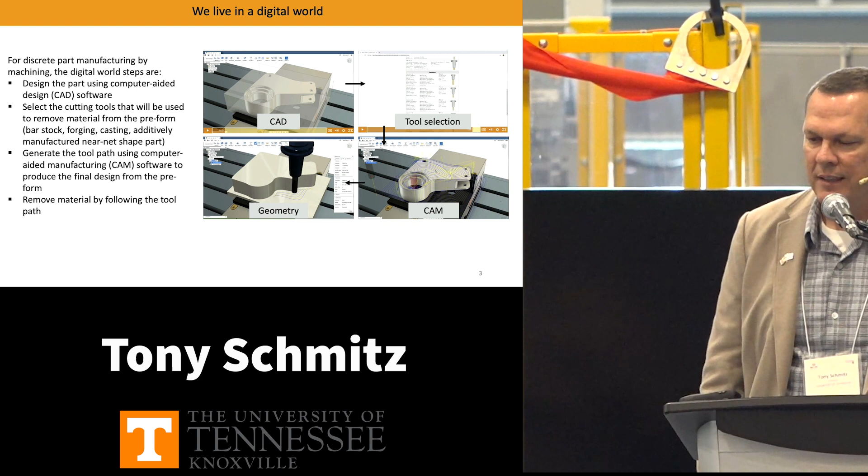Okay, so that would suggest that it's just geometry, but if you're in the room, you know that's not true. There's lots of things that can go wrong. There's many a slip twixt the cup and the lip, right?

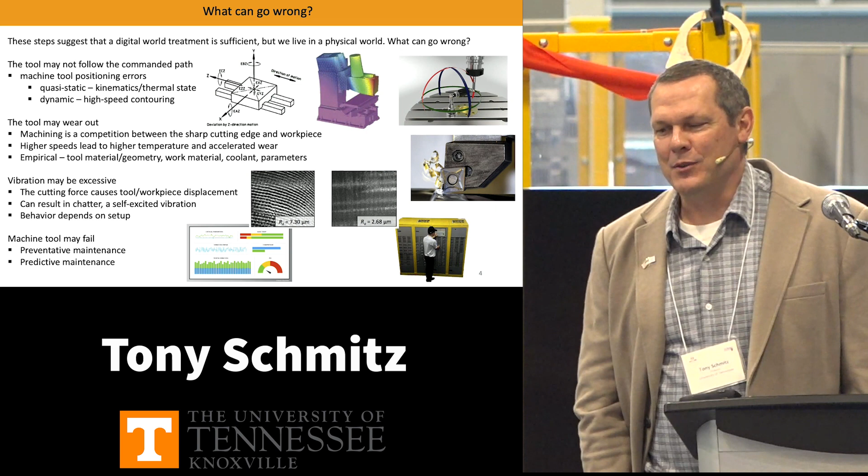So the machine tool may not follow the commanded path. I'm sure that's not true for any machine tools in this lab, but from my own experience, sometimes they don't. They have error motions, which could be quasi-static, so they change slowly over time, like thermal error motions, for example, or they could be dynamic, where we have high-speed contouring and the controller affects that positioning performance in the corners.

The tool can wear out. I saw lots of studies going on here just to my right about learning about tool wear to assess it and figure out when we ought to be changing that cutting tool. That remains largely an empirical effort. I'd say we probably haven't solved the physics around that yet, but I anticipate that we will one day have predictive models. Vibration can be an issue.

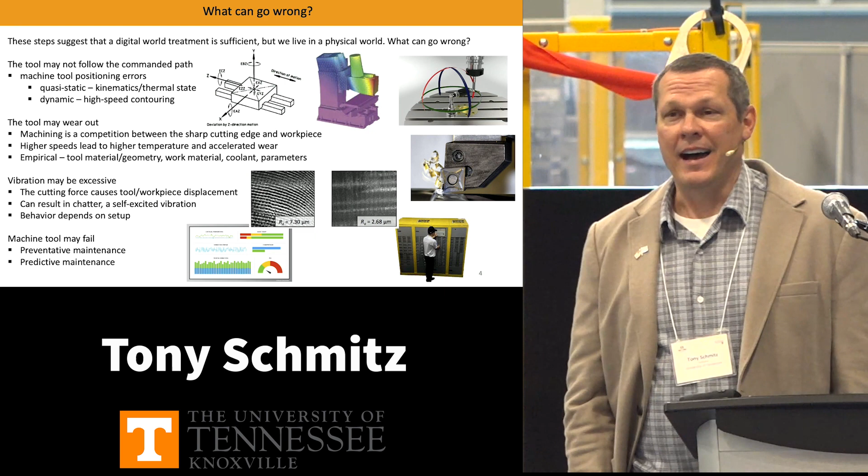That's where I spend most of my time, thinking about the implications of vibrations in machining applications, and there's some of that work going on here as well. I was thrilled to see that. And then the machine tool itself requires preventative and predictive maintenance, and that's going on here too. I had not seen the lab, nor did I know what projects were going to happen before I made this presentation. So it was very nice to see that we're so closely aligned in the things we're working on.

We have a CAD representation of the part, and we select our cutting tools. Once I've selected a cutting tool, put it in a holder, and mounted that holder in a spindle, I've now defined a dynamic system. The best use of that dynamic system depends on its vibration response, so we need to consider that when selecting our machining parameters.

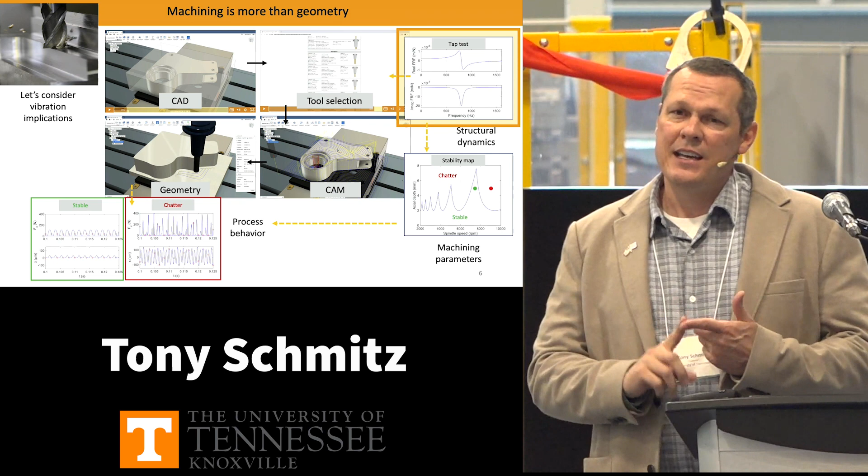One important thing in this narrative is the dynamic response at the free end of the cutting tool, or the tool tip. We characterize that dynamic response using a tap test. We have an instrumented hammer, we excite the tool, and we have a vibration transducer to measure the response. The ratio of those two is what we call the frequency response function, shown here graphically. Essentially it shows natural frequencies, stiffness, and damping ratios for each mode of vibration, and I can use that information to select cutting conditions.

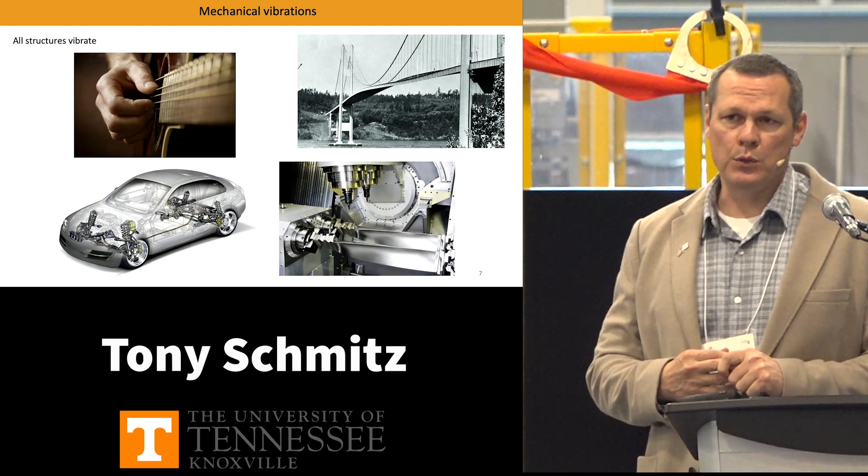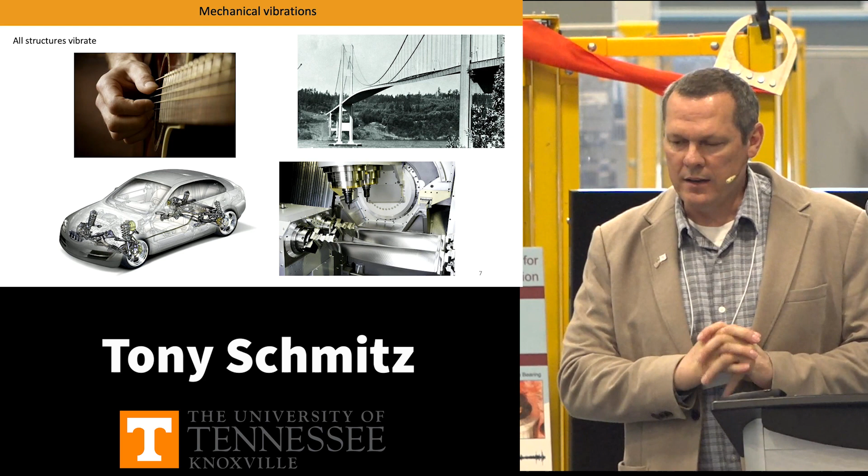At the end of the day, all structures vibrate. When I first started learning about machine tools, I was focused on machine tool metrology, then I morphed into a vibrations person. The way machine tool metrology was described to me was: you can think of the world as being made of jello. It's always moving, it always deforms, and everything matters. In machining, the reality is it's a structure, and all structures vibrate, so we have to think about that vibration response as we try to do our best work.

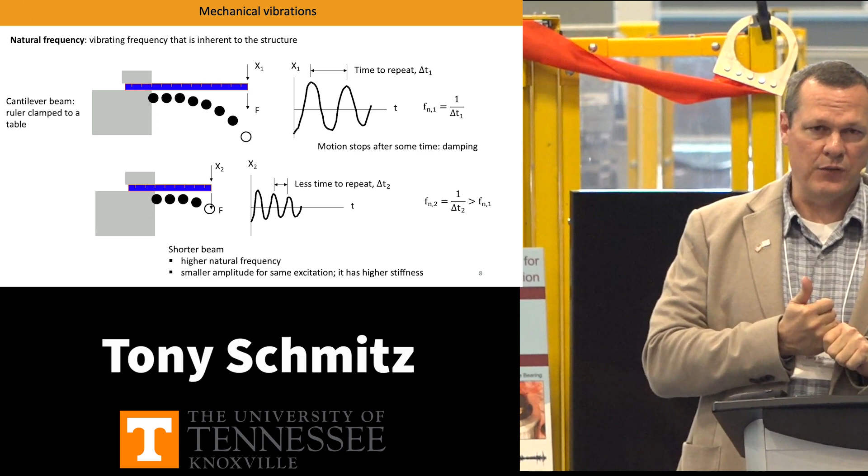Now, what if I change the length of that ruler? I just shortened it. Same ruler, same table, just made it shorter. What we'd anticipate is that the time it takes to go up and down in one of its vibration cycles is different, and not only that, but the size of the vibration is different. So I have a different time period, a different natural frequency, and a different stiffness.

That's why the stick-out length of our tool from the holder matters, and it's why it's so difficult to select machining parameters without knowing the dynamic response of your cutting tool. I'm going to be controversial and say if you don't know this, you're guessing.

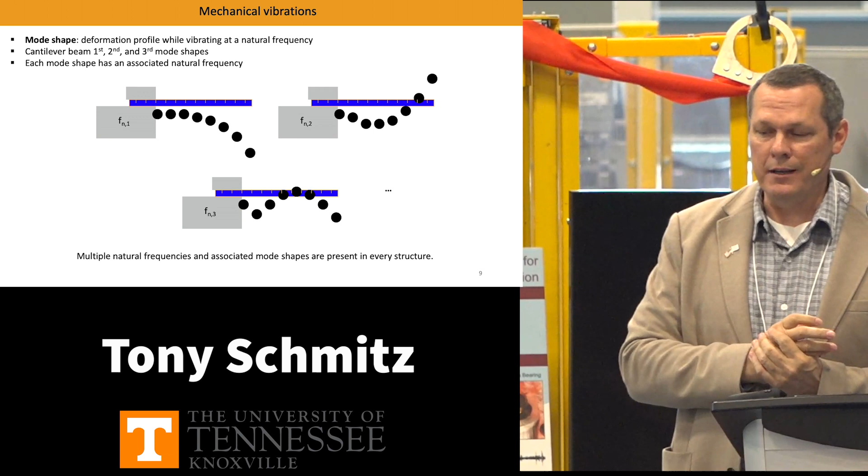Okay, but it's more complicated even than that. If I did have that ruler and I clamped it on the edge of the table and I pulled down and let it go, there is that response that we would see. That's what we call the first mode shape, which is oscillating at the first natural frequency.

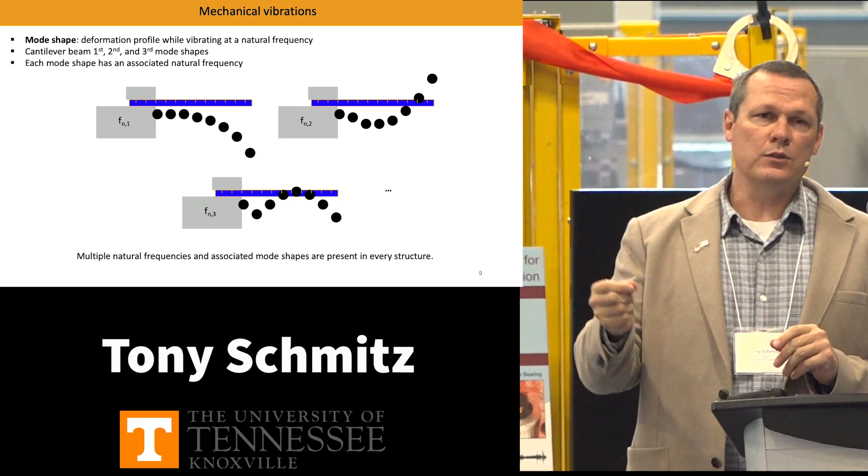But simultaneously with that mode shape, it's also oscillating at its second natural frequency. Its mode shape looks like this. It happens at the second natural frequency, which is higher than the first. Simultaneous to that, it's also doing this - this is the next natural frequency and mode shape. And it turns out for continuous systems like a cutting tool and a holder and a spindle, there's an infinite number of natural frequencies and mode shapes.

So it's a very complicated dynamic system that we want to leverage in order to select machining parameters. The way I think about this frequency response function, which is this graphical representation of these system dynamics, is like fingerprints. Each time I put a tool in a holder and place that tool and holder in a spindle, I get a frequency, I get a dynamic signature, I get a fingerprint. And when I change tools or holders, I have a different fingerprint.

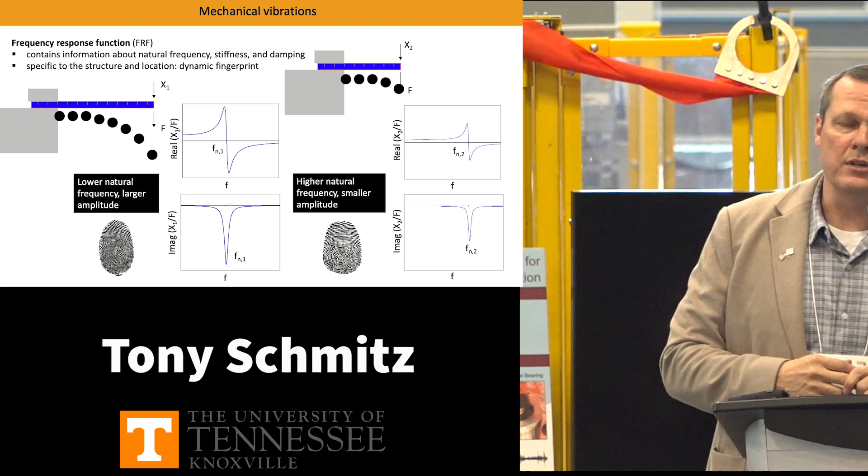That fingerprint is the frequency response function, and so it's the blue curve shown here in the top and bottom panels. Essentially what those curves mean: taller is less stiff and less damping, and left and right is the natural frequency. So if I have that information, I'm able to make educated decisions about machining parameters that I want to select. So if I change the length of that ruler, I now have a new fingerprint, a different frequency response function, and my best use of that cutting tool would be different.

My only math slide is here. For some, they'll be rejoicing that I have some math, and some will be running out the back door. That's okay, hold your seats - this is the only one.

So we can represent that frequency response function mathematically, and the only reason I include this is so you can see the terms that appear: stiffness, damping, natural frequency. We're all familiar with those concepts - they show up when we do this measurement. So if I can get at that measurement, then I suddenly have a way to avoid the guesswork in selecting machining parameters as I'm writing my CAM program.

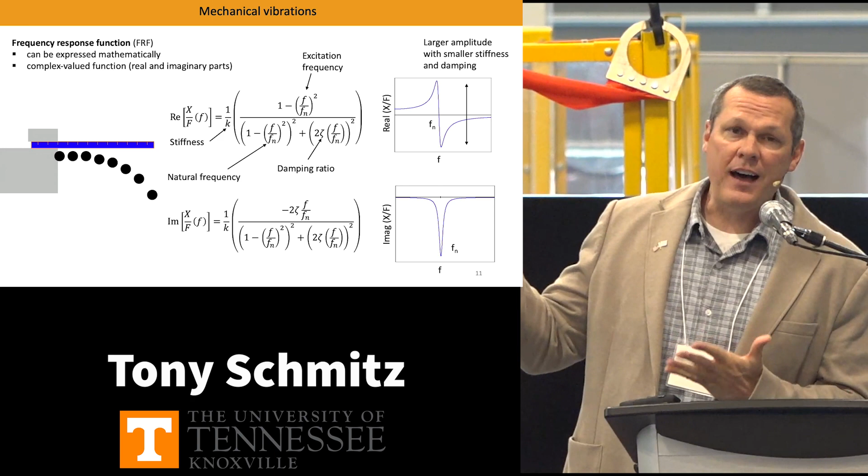Okay, so the same information is captured mathematically now that we showed with the cartoon of that ruler going up and down, and then I can plot those equations to get the frequency response function we've seen on the right.

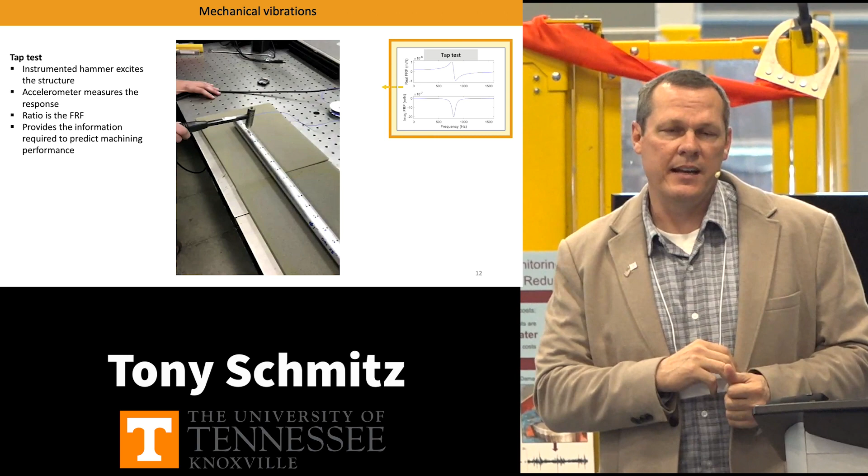Okay, so we get that information by something that we call a tap test. I have a hammer where I tap the structure. That hammer is instrumented - it has a load cell inside, so I'm measuring the force that I'm applying. And then I have a transducer that measures the vibration. What you see here is just an aluminum bar, the hammer that's going to tap that bar, and then there's an accelerometer attached to that bar. So that lets me measure that vibration signature that happens in response to the tap test.

So the sound's going to come up here, and we're going to hear a tap test in real time.

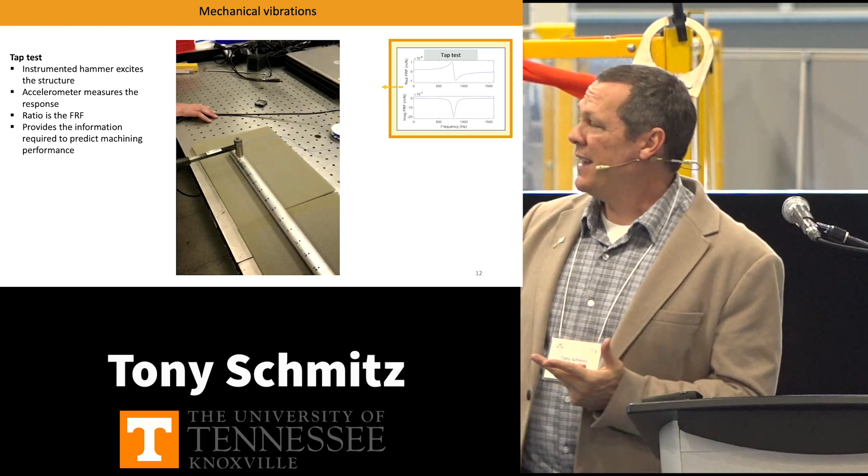So what you heard was the natural frequencies all at once, just like ringing a bell. Those natural frequencies produce acoustic waves that I can hear. The same thing happens in machining. When I hear the sound of machining, I'm either hearing forced vibration, which is good, or chatter. If we had chatter happening across the lab, everybody seated here would know there was a problem - it doesn't sound right. So we can use sound in order to assess what happens in machining.

Once we have that frequency response function, how do we use that information? That's the stability map that I showed you earlier. Let's talk a bit about machining dynamics, and we'll end up with a description of that stability map.

As I mentioned, cutting tools are designed to be stiff, and stiffer is better, but there is no infinitely stiff material - they all deflect when a load is applied. So as a mental model, you can think of a cutting tool, holder, and spindle as a stiff spring. That's a better representation than thinking of it as a rigid body. The workpiece can also be flexible.

I wish it were the case that we only had to worry about the cutting tool, but sometimes the workpiece can be the most flexible element in the system, so I have to consider it as well when describing the system dynamics.

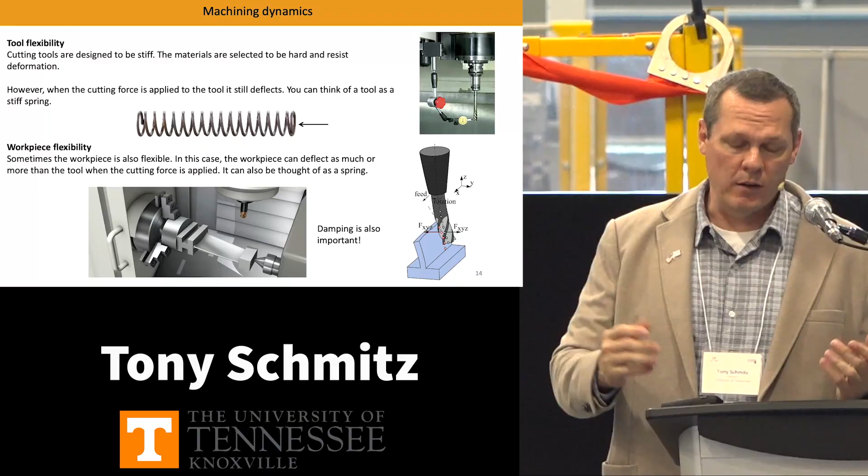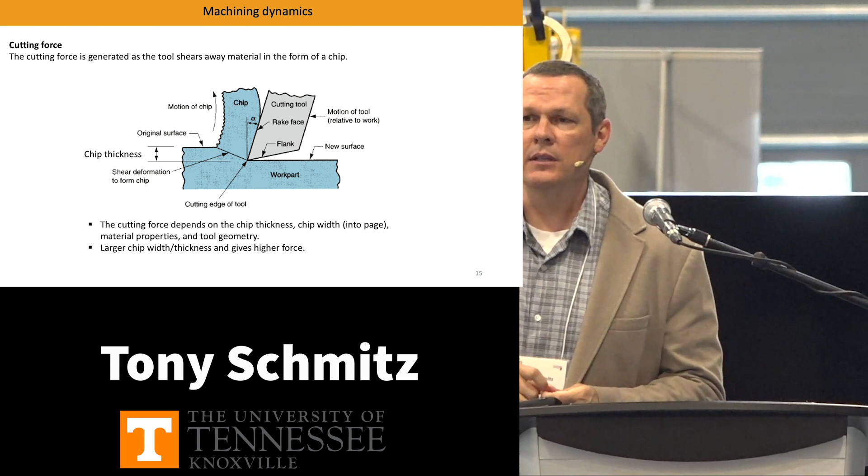The other thing we have to consider is that I have this system that deflects when I apply a force to it, and I have a force. If I'm machining, then I'm removing material in the form of chips, and that requires a cutting force.

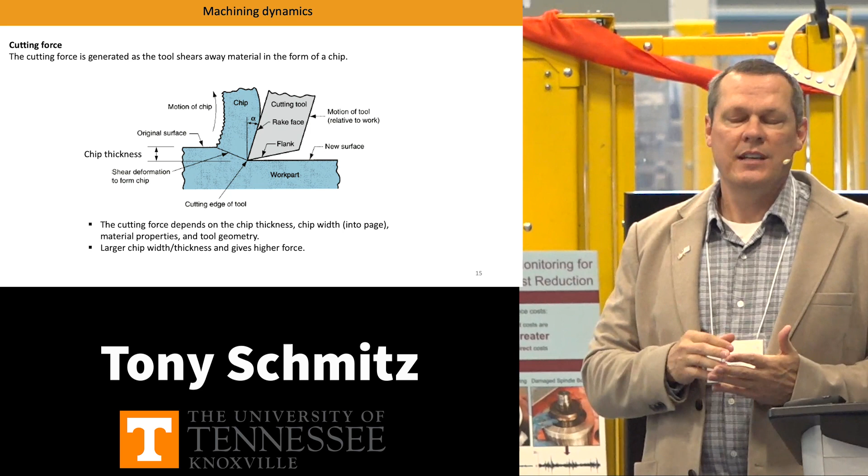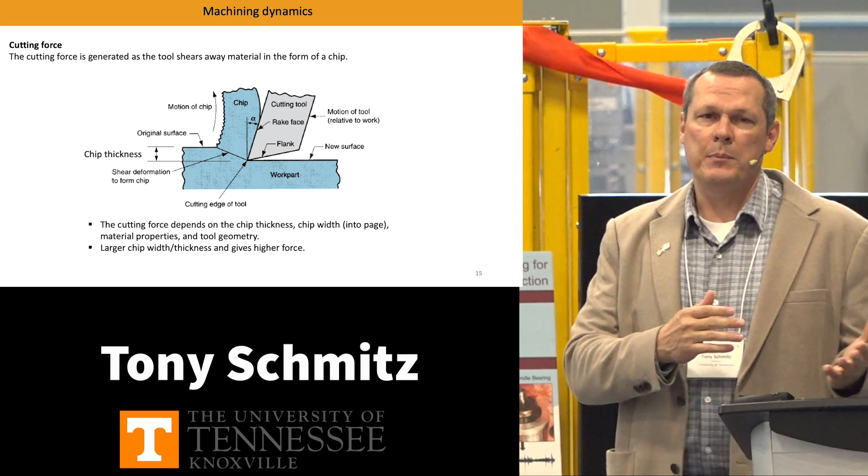There's been lots of work done to make models of that cutting force. A mechanistic approach says the force required to shear away the chip depends on the chip thickness and chip width, and we can use those parameters with cutting force coefficients that represent the material and tool geometry in order to predict cutting force.

In milling, we have this force required to remove material, but that force is not constant like it might be in turning. In milling, we have teeth which constantly enter and exit the cut, so we have this train of impulses - essentially like that hammer ringing a bell over and over again. That's very effective at exciting the structural dynamics of our tool, holder, spindle, machine system, and so we get a vibration response out.

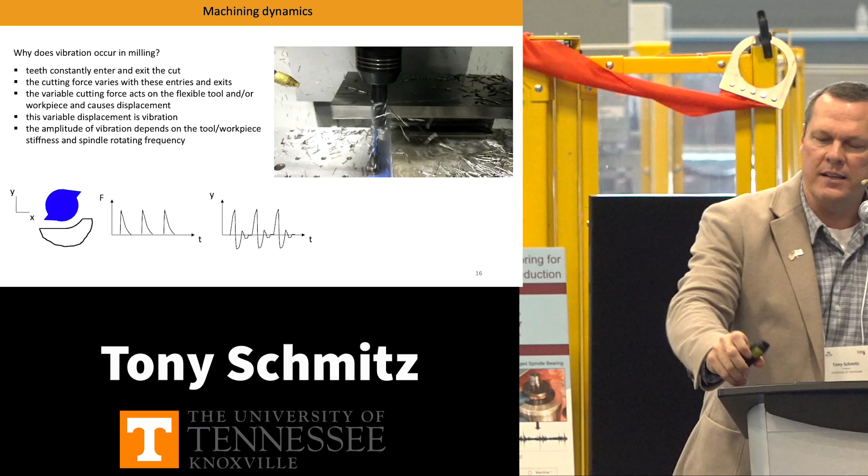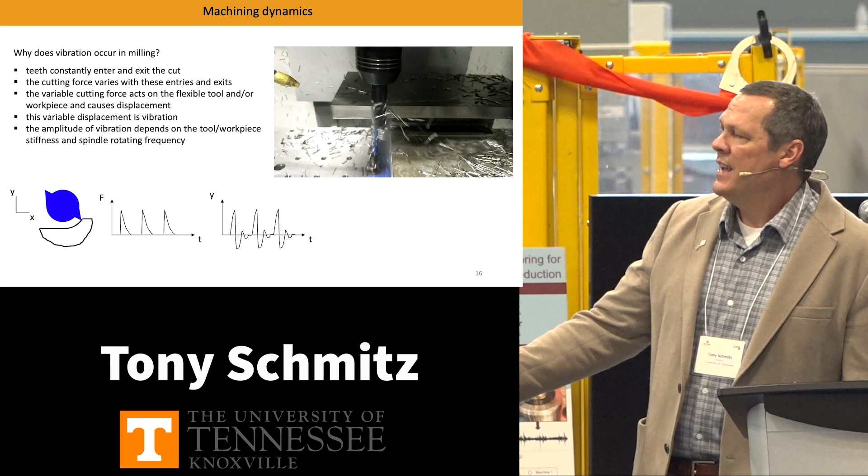So cutting force looks like this. Each one of these is a tooth entry and exit, as we're showing here for a down or climb milling operation. Then we get a vibration response of that cutting tool because it's not rigid and because I have this train of impulses exciting the system.

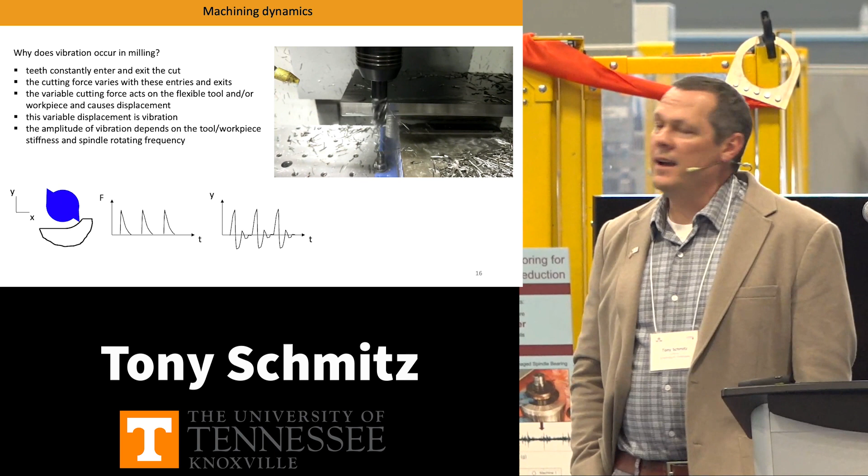There's nothing like machining - seeing chips fly off, there's nothing better. That showed this intermittent cutting operation where I have teeth engaging and disengaging, creating a chip with each tooth passage.

As I mentioned, there are two main types of vibration in milling. There's forced vibration, which happens at the rotating speed times the number of teeth - we call that the tooth passing frequency. That tooth passing frequency excites the system dynamics, but it repeats with every tooth passing frequency. So even though we have vibration, it's repetitive and it's okay - we call that forced vibration.

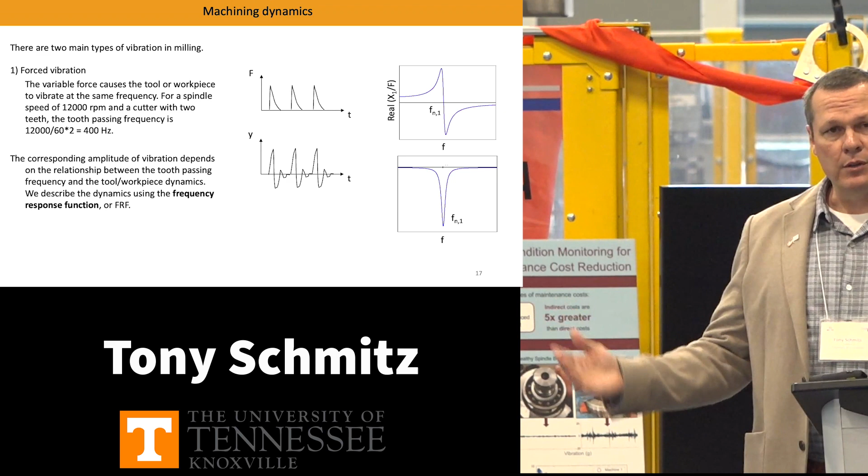We describe that vibration also using the frequency response function, and we have some size of the response which depends on the relationship between that tooth passing frequency and the natural frequencies in our system.

The other type of vibration we're interested in machining is called self-excited vibration, or chatter. Chatter is a case where I have some mechanism that modulates a steady input force into vibration near a natural frequency. There's actually lots of examples in nature. Whistling is a self-excited vibration - I have a steady flow of air across my lips, but it produces an acoustic response, and I can hear the sound because of that.

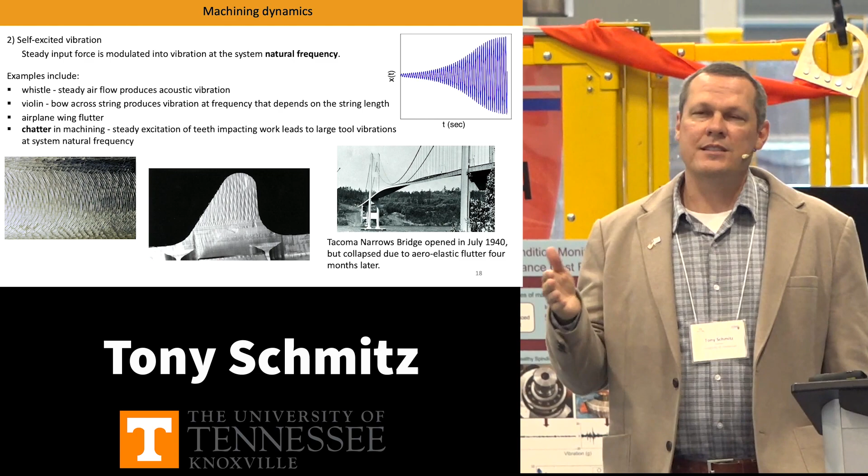Playing a violin is another example - I have a steady pull of a bow across the string, but that produces sound. That's actually a stick-slip phenomenon due to friction between the bow and the string, which is why we rosin the bow. Airplane wing flutter is also a self-excited vibration, and then there's chatter in machining. In this case, the mechanism is I have a steady input excitation from the teeth entering and exiting, but that is converted into vibration near a natural frequency, and I'll show you how that's done in just a moment.

I showed you the example of this cutting tool removing a chip, which requires a force to do so. However, because the tool is not rigid, I can think of it as being supported by a spring and a viscous damper, like a shock absorber. So when force is applied to shear away the chip, the tool deflects, and that causes it to oscillate.

The outcome of that tool oscillation is that those oscillations are imprinted on the workpiece surface. If we're in a turning operation, eventually that surface comes all the way around and the tool encounters it again. That means that milling and turning has a memory.

There's a feedback mechanism, and we know that any feedback system, if I turn the gain high enough, can go unstable. In this case, the gain is the chip width, or the axial depth in milling. So as I change the spindle speed and axial depth, this feedback mechanism can cause the system to go unstable.

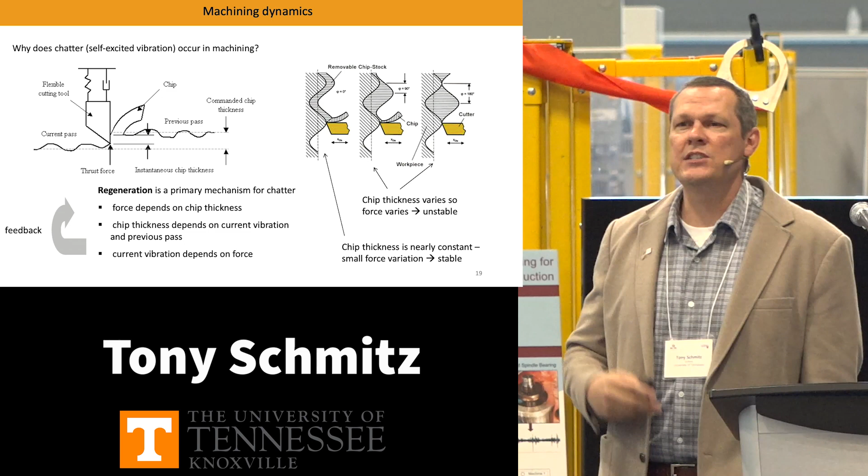If it happens, however, that those are not aligned—the vibration now and the vibration earlier—then I can get a chip thickness that varies, getting larger and smaller. As the chip thickness gets larger and smaller, so does the force, which influences the vibration, and so I can get this self-excited vibration phenomenon that we call chatter. Something we want to avoid, but something we can avoid if we understand the system dynamics.

Those dynamics are represented in this thing we call a stability map. On the vertical axis is my axial depth of cut—in CAM software, that would be my step down. The horizontal axis is spindle speed, so how fast is my tool rotating.

You can see there are two regions: a gray region and a white region. The gray region is where the combinations of axial depth and spindle speed would give me chatter, and the white region is where combinations of axial depth and spindle speed would give me stable machining operations.

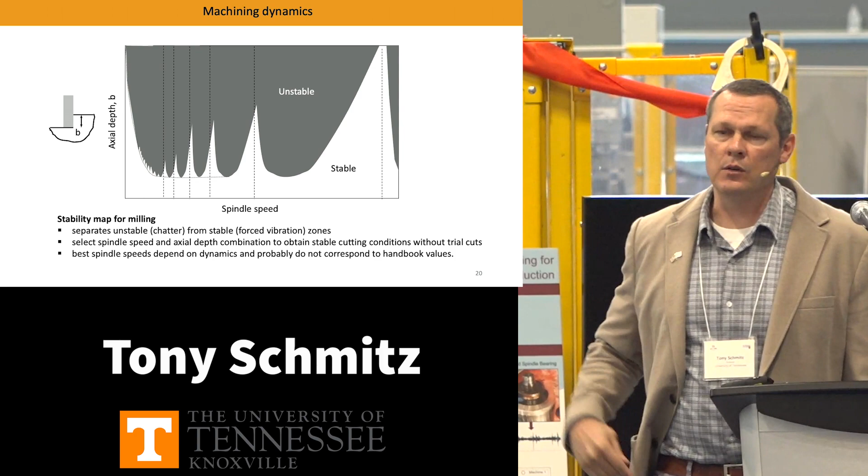If I had this information available when writing my part program, I'd have a much better chance of high metal removal rates without chatter, avoiding some of the trial and error where we write the part program, run it on the machine, find it wasn't right, send it back up, and try again. Avoiding those loops reduces cycle time and cost. That's what we're after here.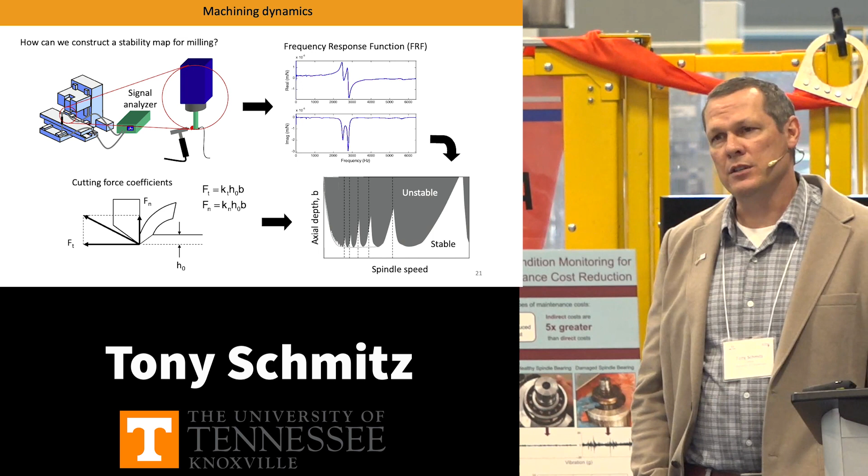So let's say you're interested—how would I get that map? Well, I need that frequency response function. As I mentioned, I showed you the video of the tap test; we can use that to collect the information describing my dynamic system. Then I need these cutting force coefficients that relate the force necessary to shear away the chip to the chip area. So if I have those two pieces of information, I can generate that stability map.

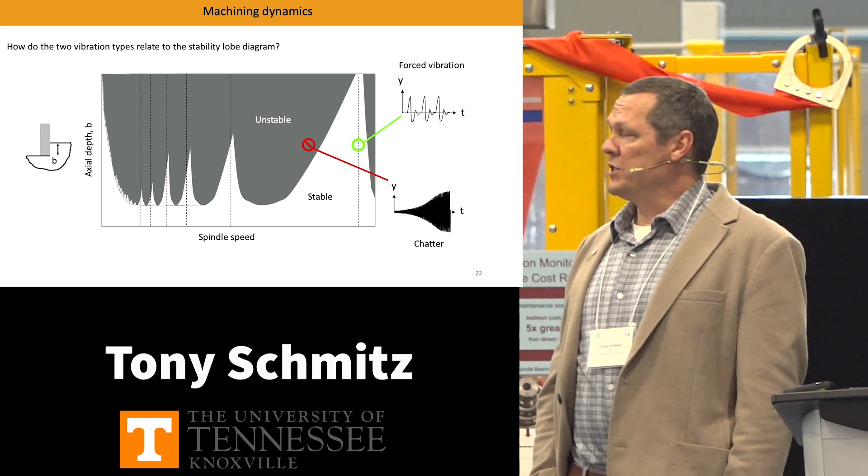Now I can relate it to the performance of my milling operation. If I selected a combination of axial depth and spindle speed in the gray zone, that's where we'd come up with chatter and vibration that grows over time, bad surface finish, large forces, not good. If I selected a region in the white zone, on the other hand, that's where I have forced vibration, consistent surface finish, good milling result.

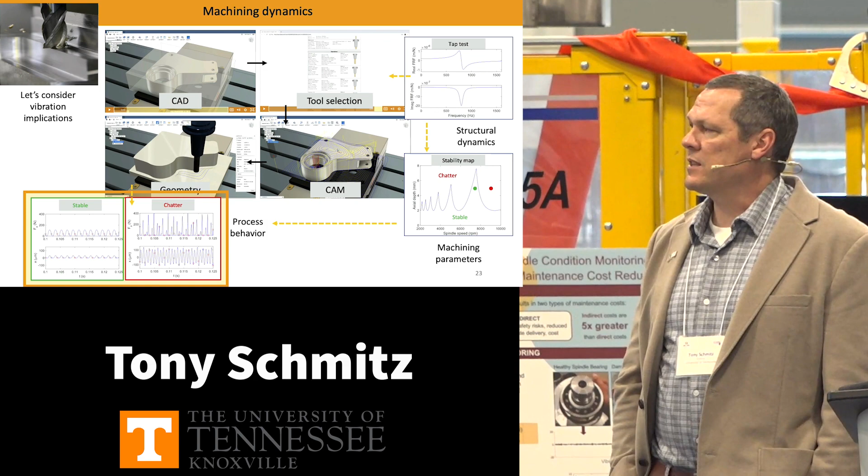Now that I've selected my machining parameters and programmed my geometry, I'm ready to machine away the stock, and then I can have the outcome, which is stable or unstable machining.

So I prepared an example here for you. One of the things we often do in machining is pocketing operations. What I'm showing here is a tool path enlarging an existing pocket. One of the challenges we often face, even though we select the radial depth of cut, in this case a 25% radial immersion cut with a 4 millimeter axial depth, so that would be into the screen. The blue circle is my cutting tool, I'm just not showing the 4 cutting teeth.

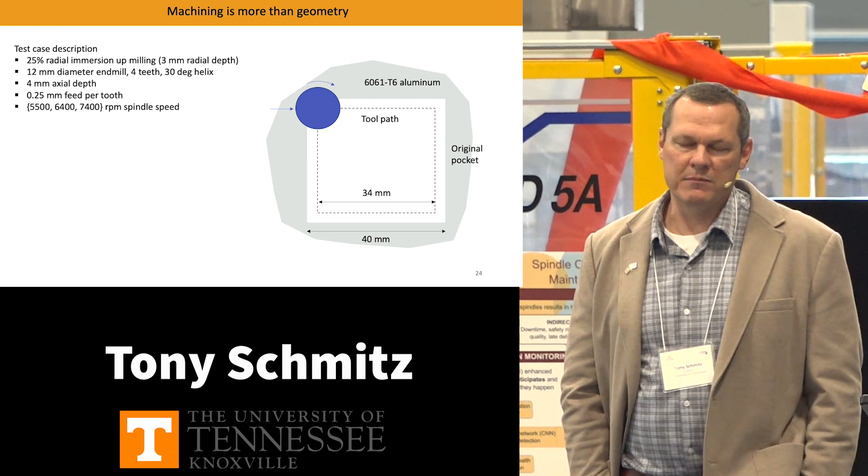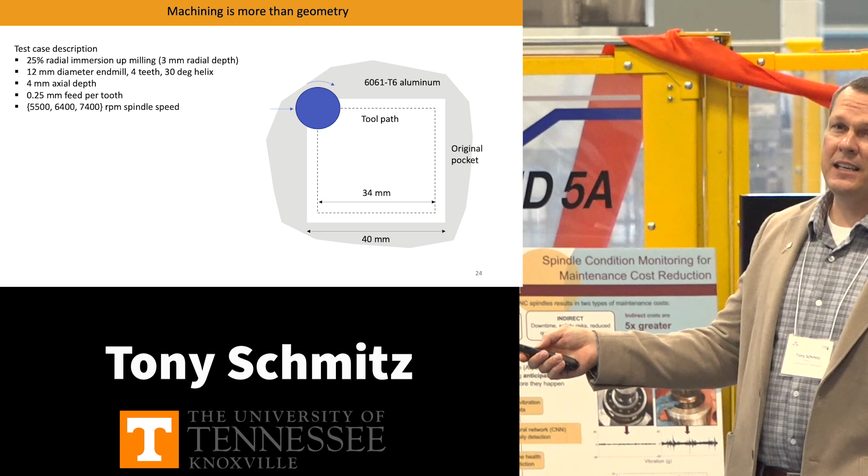As I traverse around this square, sometimes that radial depth of cut is what I told it to be, the 25% radial immersion. But when I get into that corner, instantaneously it's not. In fact, for an instant it goes all the way up to slotting when I get into that corner. So what are the implications for my machining performance?

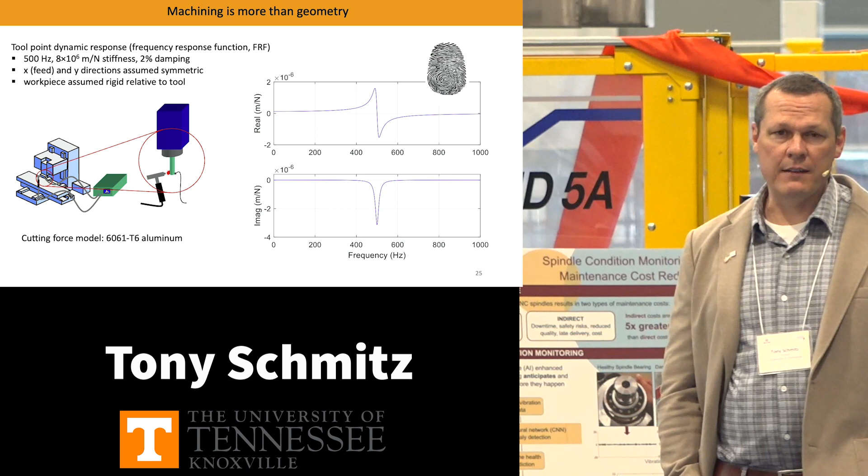The first thing I need is that fingerprint we mentioned, the frequency response function. In this case I have a simple example, just one mode of vibration at 500 hertz with some stiffness and damping, and that describes the blue curve, which gives me my system dynamics.

Given that, and the fact that I'm machining 6061 T6 aluminum, I know my force model, so I can generate my stability map. I wanted to show some results at different spindle speeds and some different stability maps.

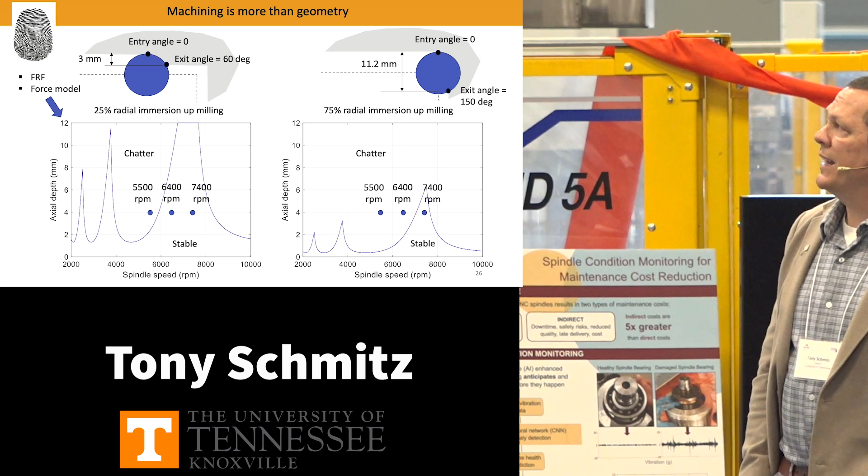When I get into the corner, on the other hand, my exit angle increases because of the geometry of that internal corner, I could be instantaneously at 75% radial immersion. Now my radial immersion has changed my stability map, so you can see the height of these peaks has moved down. At 25% radial immersion I can get that tall, at 75% radial immersion I can only get that tall. Left and right, these best speeds remain the same because they depend on the vibration response, not the radial depth.

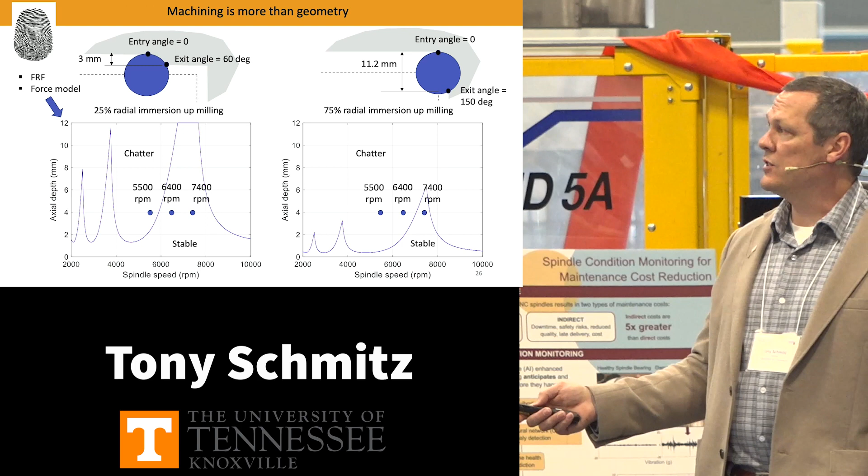So when I get into that corner, two of my spindle speeds are unstable, I would get chatter. Only one of them is stable. That's why a lot of times when we're doing pocketing operations, we hear that squeak in the corner. That's chatter in the corner because the radial depth of cut has changed instantaneously.

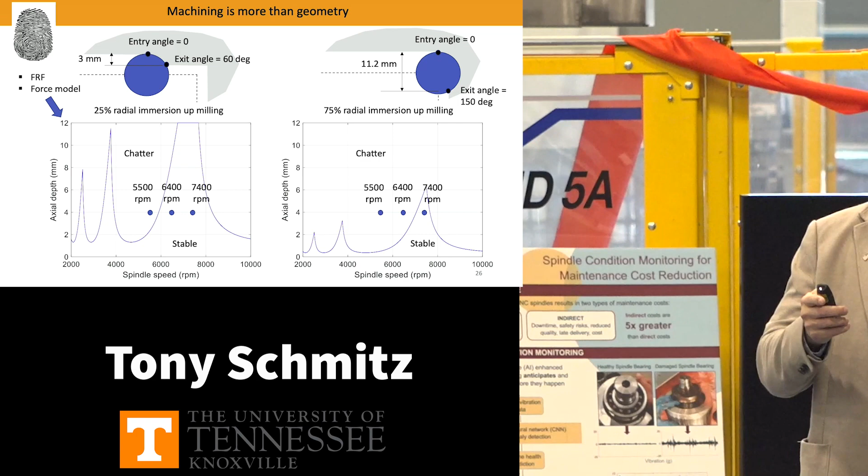So what would the results look like? On the left is my 25% and 75% radial immersion stability maps, this is for 5500 RPM. On the right, the top plot shows me the radial depth of cut, so it's 3 millimeters until I get into the corner, and then all of a sudden it gets much higher, up to 11.2 millimeters when I'm into that corner.

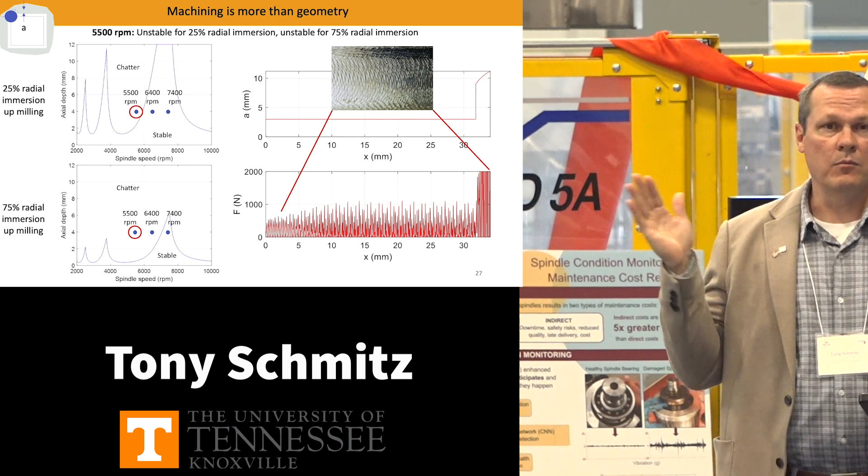The bottom plot shows me the cutting force I'm going to see with that end mill when completing that operation. After some initial transients when I enter the cut, the force becomes non-repeating and very large, and then gets really out of hand when I get into the corner. Both of these would be chatter conditions. This is where I get bad surface finish, this is where maybe I chip a tooth, because I've selected a spindle speed that's not stable for either the 25 or the 75% radial immersion.

Okay, what if I went to the 6400 RPM choice now? In this case, I'm having stable cutting conditions for the 25% radial immersion portion of my cut. So now we're looking at the blue curve, superimposed on the red curve, which was all unstable. For this portion of the cut, I have repeating forces at a consistent force level, all good.

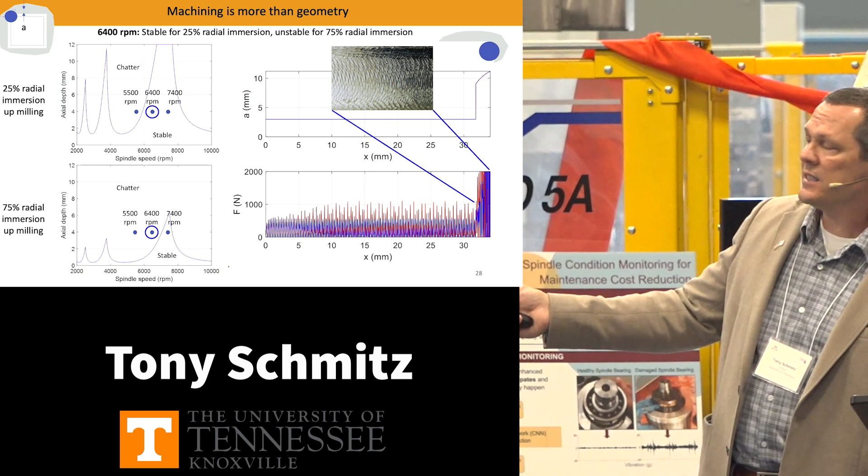I get the surface finish I want. But now when that radial immersion changes in the corner, I still go unstable when I get in the corner. That's the squeak, that's the chatter in the corner, and the reason I might have to come in and fix that corner when I'm all done.

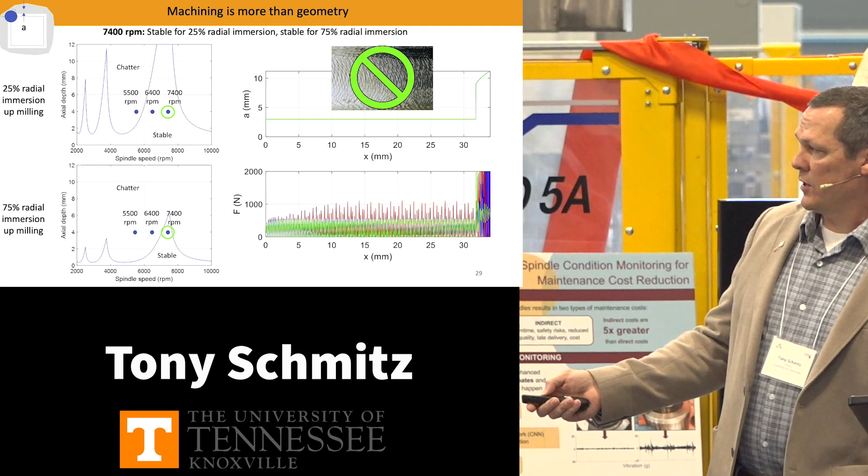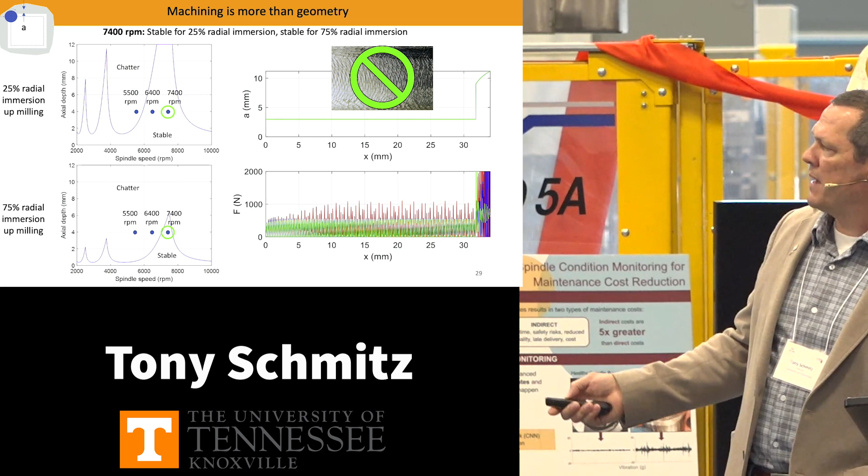Okay, so now if I go to 7400 RPM instead, same radial depth of cut profile, but now the green response for cutting force shows it's repeating here as I'm moving across, and I get into the pocket. There is a change in the force, but that change doesn't cause these dramatic force oscillations. It's just a change in the cutting force because my exit angle has changed.

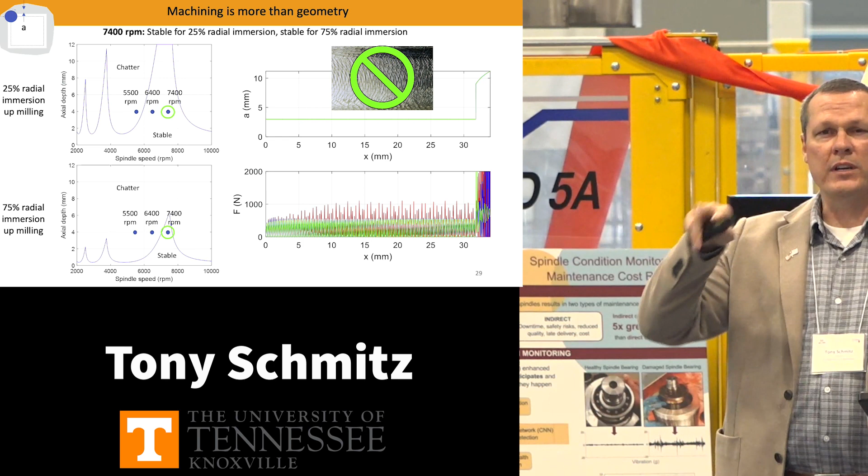And because of the broader sweep of the periphery of the tool, for a 4-tooth cutter, I never have no teeth engaged in the cut. And so that's why the force no longer goes to zero there.

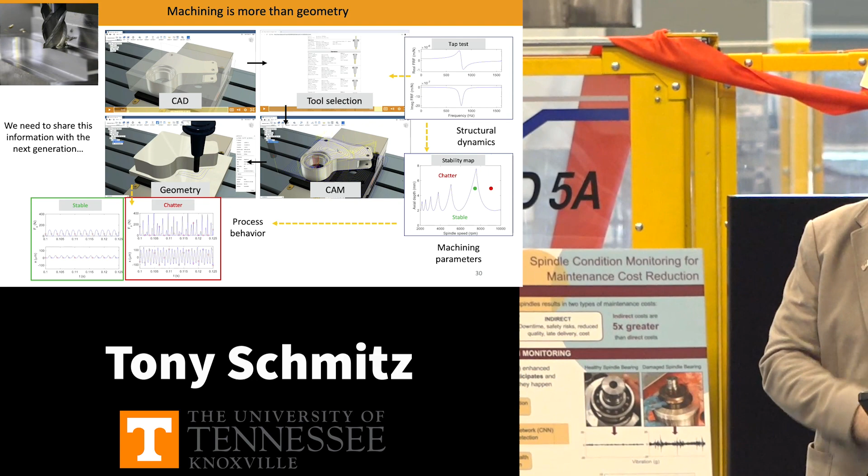That's good, and those are things that we actually understand. The barrier today is just moving that into production and finding ways to do that, but we do have to teach the next generation so we can carry that technology forward for those who will move machine tool technology and development in the next years. So let's look at some of those efforts here.

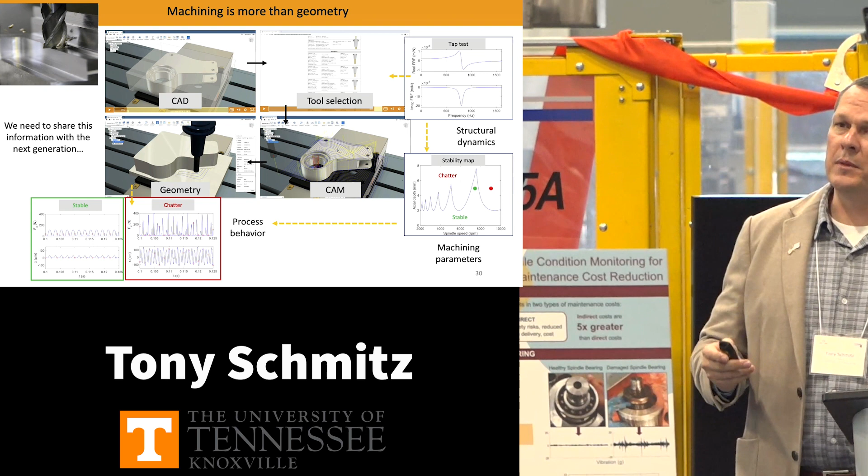One of the programs I developed is called America's Cutting Edge. Maybe I can call it North America's Cutting Edge. It's a workforce development program for computer numerically controlled machining and metrology. I just learned about a program here at McMaster University. It's very impressive, and I'll look forward to talking with the folks from that program more. In a similar setup to your outreach program, we have an online and an in-person component.

For the online component, that's about 6 hours to complete. We introduce machining and have the online participants generate their first tool path. Once they've done that, we go back and say, let's take a look at those machining parameters. So we provide an introduction to machining dynamics. I wrote an app that's released with the training that simulates machining force and vibration.

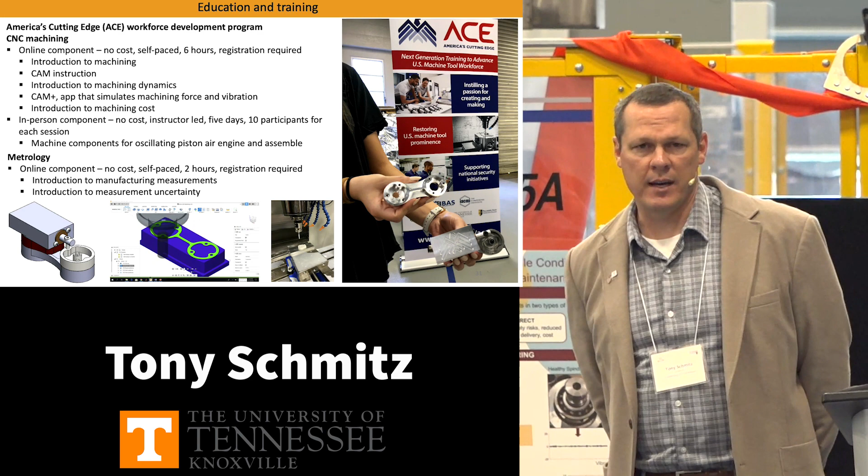It does a virtual tap test, generates a stability map, and then lets you run simulations to see the force and vibration. It even plays the sound of the cutting force, so students who have never been in front of a machine tool can hear the difference between a stable and an unstable cut. And then finally, we wrap up with machining costs, because in the end, if you're not doing it to make money, then you're at a university.

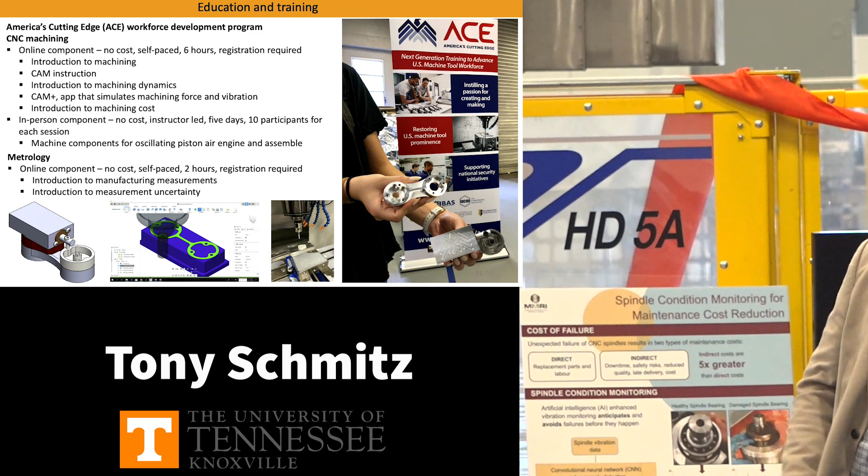After the students have done that, we have an in-person training opportunity. It's a 5-day program with 10 participants per session, also offered at no cost, where the students machine the components for an oscillating piston air engine, shown here in the lower left. So there's the solid model: a base, a wheel, a valve block, and a piston block. At the end of the week, they assemble that and we run them.

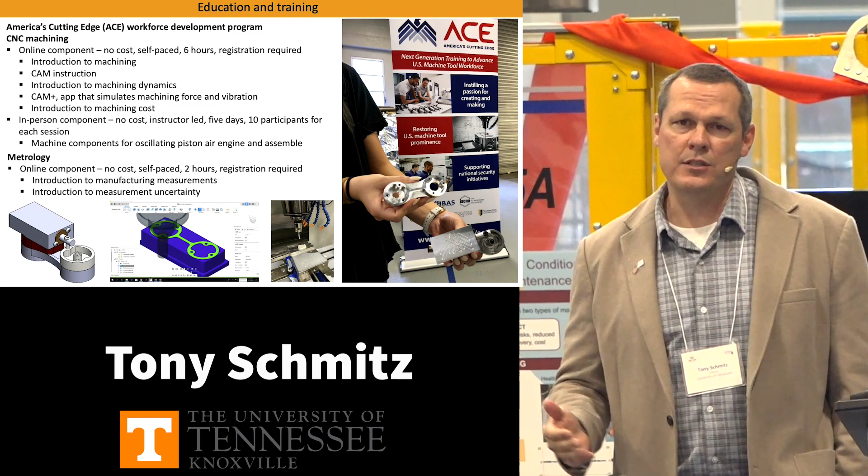The second online training we have is for metrology, or the science and application of measurement. That takes about 2 hours to complete. We show the many possible manufacturing measurements you might see in a production environment, and then talk about measurement uncertainty — how much can I trust those measurements?

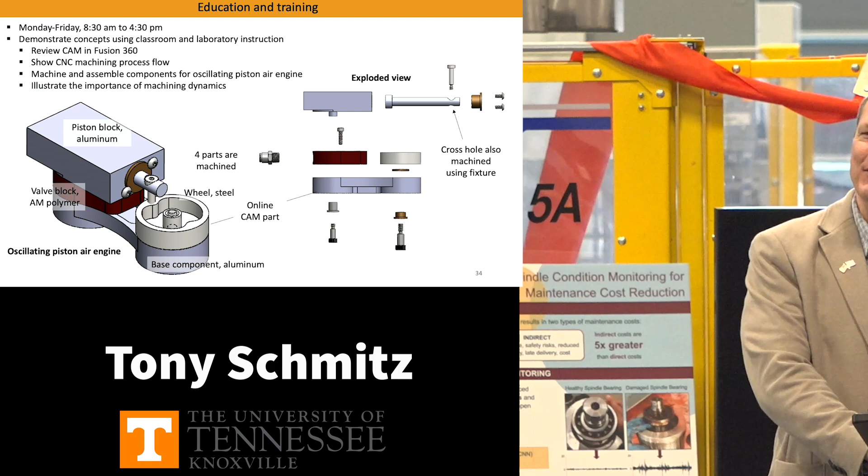Okay, don't laugh at that. So here is our oscillating piston air engine, the 4 components that they machine. We have an aluminum component.

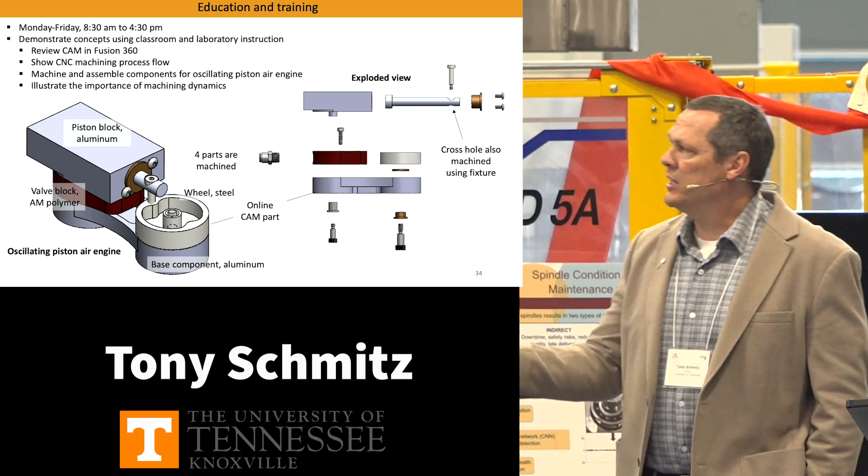This is the part that they program online, so they've already seen it. Within an hour of arriving at the facility, they are machining that part. So we engage them right away and get them going.

Then this is a piston block. We do the pistons in advance because we don't do turning during the training. We do have them use special fixturing to drill that cross hole, however.

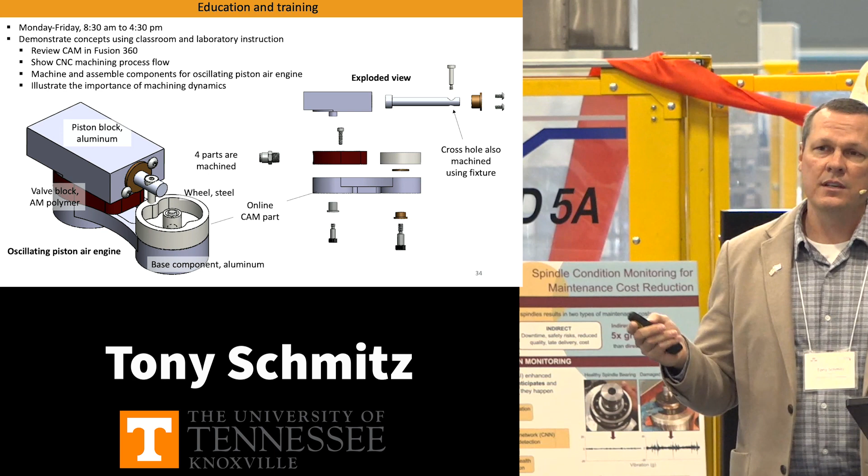There's a steel wheel, so that's our second material. And then we have a 3D printed polymer block for our valve block. Because of the internal passages, this is a push-pull reciprocating engine run off 90 psi compressed air. It was easier to print it, and then they just machine the mating faces. There's no seals in this engine, so it's all fit in order to get the performance.

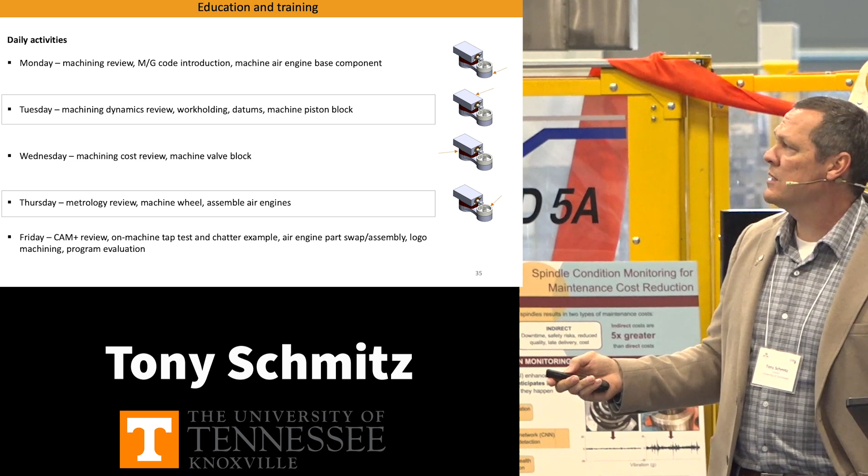On Monday, as I mentioned, they machine the base component. We talk about machining, M/G codes, and get all the students on the machine. On Tuesday, we talk about machining dynamics, work holding, how we identify and use datums, and then we machine the piston block.

On Wednesday, we talk about machining cost and additive manufacturing, and they machine the valve block. On Thursday, we do a metrology review. They machine the wheel, and this is the first time they assemble their air engine.

So they begin practicing. On Friday, we review the CAM Plus app and the implications of machining vibrations. We do an on-machine tap test and chatter demonstration. We have them swap parts and put their air engines back together. We let them put a logo to personalize their piston block and then do a program evaluation. So it's about 40 hours altogether through the week, and we keep them running all day long.

For the metrology program, this one's also a couple of years old. We're closing in on 1,000 participants. This is no accident—where these dots show up is where manufacturing is done predominantly in the US.

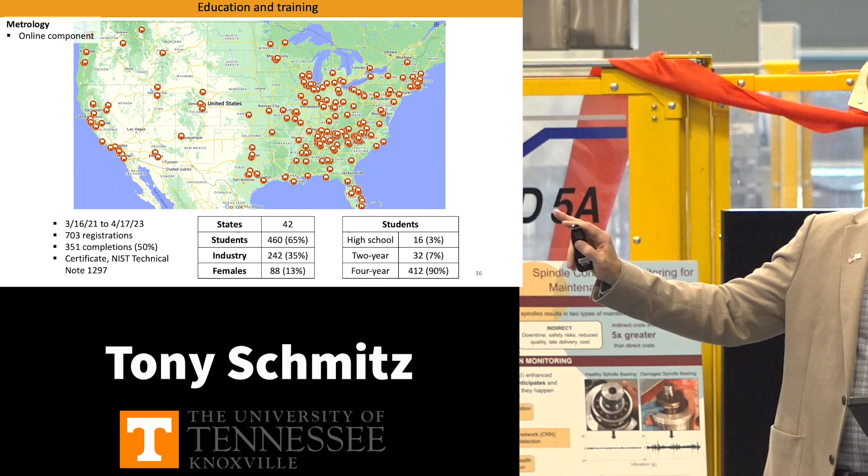Texas does a lot of manufacturing, as does California, the upper Midwest, and the East Coast. Not a lot here in the central US, so we don't have a lot of students there. This was completely self-organized—I didn't do any patterned outreach. This is just where people joined, which was quite an interesting outcome.

So we're also interested in promoting machining at the university level, and this last year we had the first Southeastern Conference machining competition.

If any of you have been to an SEC football game in the US, we say it's just different and it matters more—I don't know if that's true or not. I played college football, it turns out, football, not football.

I played at a university in Philadelphia called Temple University, but we did play at Tennessee. So I've played in the stadium at Tennessee many years ago, 1990. Yeah, I'm really that old.

In any case, the SEC is near and dear to my heart. When I finished playing, I actually had a tryout with the Calgary Stampeders. I almost came to Canada, but then I wouldn't have done machining dynamics. So I think things were appropriate. Really what happened is they cut me and I went back to grad school.

For this first SEC machining competition, we had 4 schools: Auburn University, Mississippi State, Texas A&M, and University of Tennessee. We took the SEC logo, made it large, about this large, and separated it into 4 quadrants. Each one of those quadrants was just undersized from a 12-inch by 12-inch by 2-inch aluminum plate. So what each team got was the design that they had to machine. You can see we did some lightweighting on the back.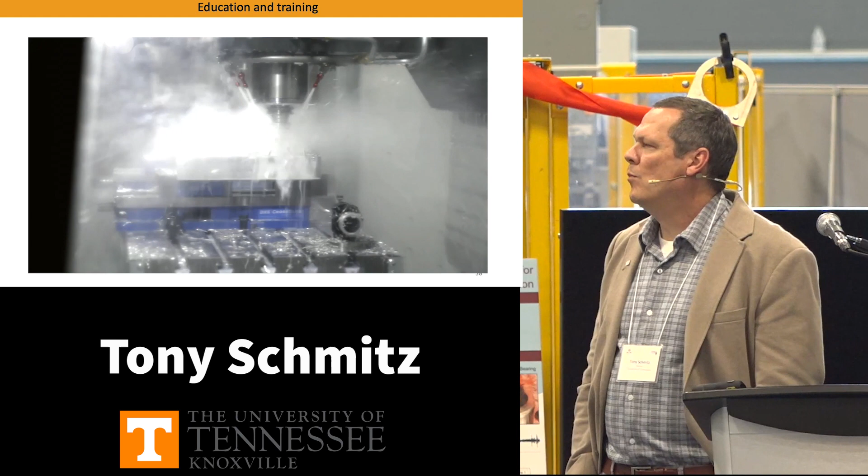University graduates from a lot of these schools you see here today are developing this next generation of critical thinkers who can take a look at a problem and say, you know what, this is one way we've always done it, and now we want to try it a different way. As an engineer, working on the machine hands-on is actually the best way to learn. You get to do the actual work, make the parts, touch it, simulate, try out different strategies. This way, when you go into industry, you really have an idea of what it's all about.

The event today is representative of what we need across this country. We are better when we join forces. We are unified. We're a strong chain together. We need to be able to recruit the next generation in. We need to be able to train them to higher standards. We need industry to be involved in that, to send that demand signal and create that close relationship with these next generation students. It takes a united front to do that of all interested stakeholders in the space of manufacturing. The winner is Tennessee.

I'm in East Tennessee for a reason. I'm here because there's a national lab, a top university, community colleges, high schools, industry. We have all these things that come together in order to produce an environment that makes competitions like today possible.

So boy, did I get a lot of shade from the other universities because I hosted and won. They were all convinced that I cheated. I will never again host a competition. In any case, it was a lot of fun.

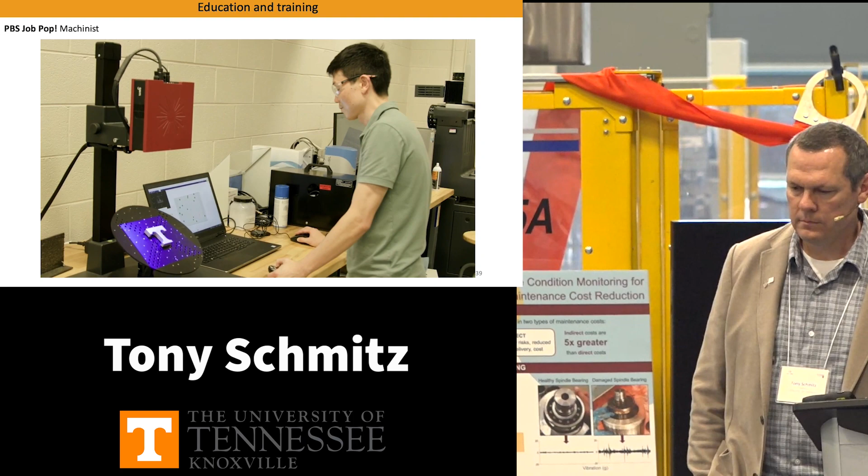The best thing about machining is that I get to make stuff in metal and other materials. At the end of the day, when I've produced something using a machine tool, I know that I've added some value to the world. Machinists are the people who manufacture and create many of the items you use every day. But how do they do it? Machining is taking a sharp cutting edge, removing material, and creating a new surface. You become a machinist by understanding geometry, math and machines, and then taking all of that knowledge together to remove material using a machine tool to produce the part you want. Machinists use super precise measurements to make sure their tools cut exactly what they want to make. You probably know how to measure in feet or inches, but machinists measure in thousandths of an inch, thinner than a piece of hair on your head. Most machinists make between $37,000 and $60,000 a year and work with a team of professionals. In machining, there's lots of different jobs. I could be the person who designs the machine tool, the person who selects the cutting tools, or the person who actually runs the machine to make the parts. Cars, airplanes, plastic drinking bottles, almost everything you touch during the day at some point was touched by a machine tool. Learn more about this and other jobs at jobpop.org.

Yeah, you can clap. It's okay.

The outreach activities are clearly very important. We need to regrow the machine tool infrastructure, particularly in the U.S. One of the efforts we've put together is the Southeastern Advanced Machine Tool effort, which has a mission of establishing the Greater Tennessee Valley, from Huntsville, Alabama up to Northeast Tennessee, as a leader in the U.S. for machine tools research, development, education, and training. That was funded by a grant from the Department of Defense, $5 million over 3 years, a federal investment because it's important to DoD's mission to be able to machine components.

The key participants in this effort are the University of Tennessee, which leads, a Manufacturing USA Institute called America Makes, and Oak Ridge National Laboratory. In collaboration with those leaders and about 50 industry partners, we have 3 pillars that we focus on.